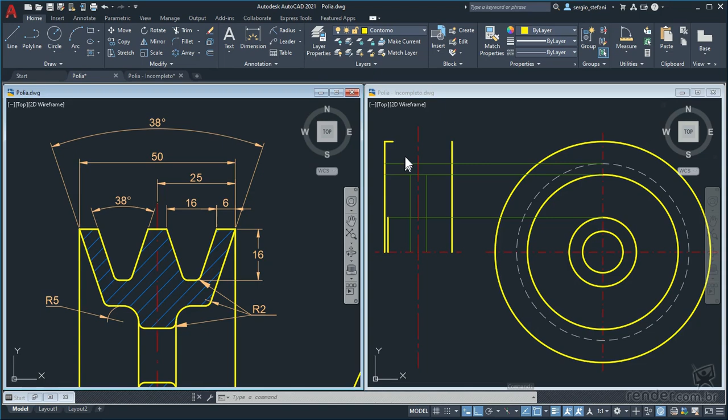We will focus on making the detail of the pulley where the strap fits. Observe the 38-degree angles. See that one side is the same as the other, so just do one side and replicate to the other. This line with dimension of 6 is already done here. So let's make this sloping line that's 19 degrees from the vertical, that is 38 divided by 2.

But since the angle is measured from the horizontal, then we do 90 minus 19 equal to 71 degrees. This is the angle we're going to use. With the current border layer, we activate the line command and click on the set point. Disable the orthogonal to better visualize the interaction. We press Tab to enter the 71-degree angle as shown. Press Tab and move the cursor down to this position.

With this inclined line made, we activate the fillet to create this radius of 2. Click on Radius, we type 2 and select the inclined line and the line representing the bottom of the belt here. Note that the opening of the belt tier is 16 mm. So we will create an auxiliary line 16 long at the end of this line, with the construction lines layer. In this way we have a base to do the mirroring of the inclined line.

With this line ready, we will use the middle of it as the mirror line of the inclined line and the arc. We activate Mirror, select the objects, press Enter. As a mirror line, using the midpoint precision tool we select the middle of the line, and with the orthogonal on, we move the mouse down and click. We answer no to whether we want to delete the original objects.

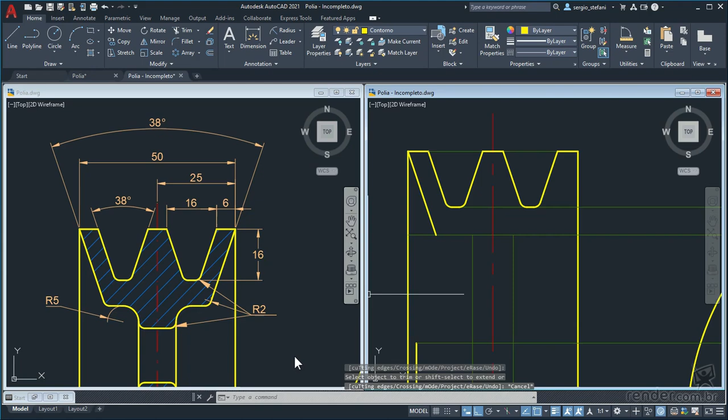See that this line is parallel to this one, so we use an offset, with the through option, and we click on this point. With Trim and the Shift key pressed we will extend this line in both directions. Now let's finish the left side and then do the mirroring to the other side. We activate Fillet and rounding as shown. Let's take advantage and make the roundings of 5 between these lines. Follow.

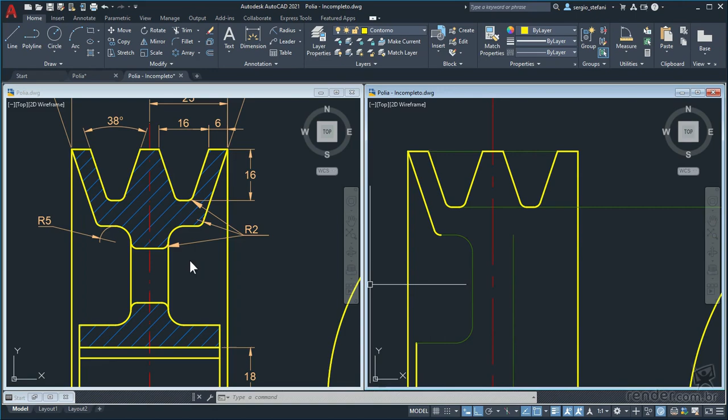See that we don't have the reference lines that refer to this opening. The size of this opening is here, with a radius of 32 and another radius of 49. From the center line we will use an offset, with a distance of 32, to make one of the reference lines. And another offset of 49 to make the other reference line.

Now we can do these two roundings of 2. We activate Fillet, set the radius to 2. We click on Multiple and create them by selecting the respective lines. Note.

With Trim, we erase the unwanted parts. We activate the line and create the line that connects the two arcs. Without any active commands, we select the objects that are in miscellaneous layers, and assign the outline layer.

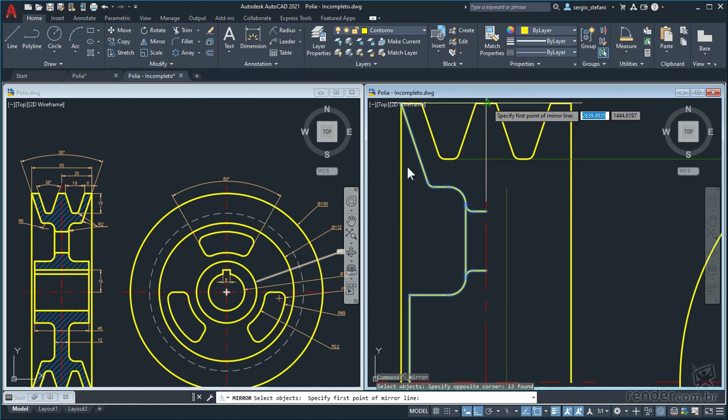With the use of mirror, we will mirror all these objects to the other side. We activate the command, select the objects, and as a mirror line we use the center line. And watch the result.

See that the bottom is almost the same, so we activate the mirror again and select all the objects. We use the horizontal center line, and we confirm it. Since the cut underneath has no tier, we simply erase this detail.

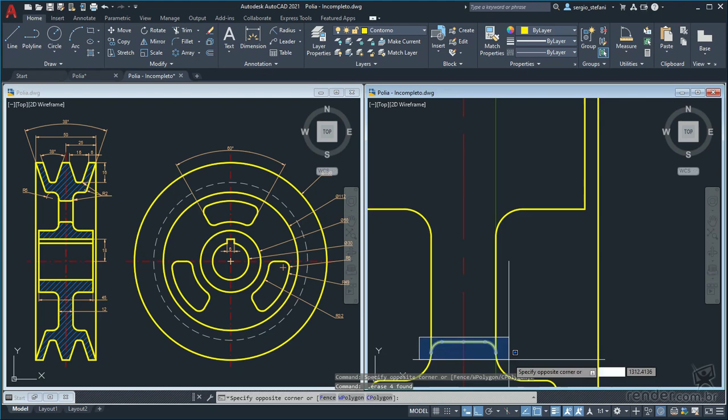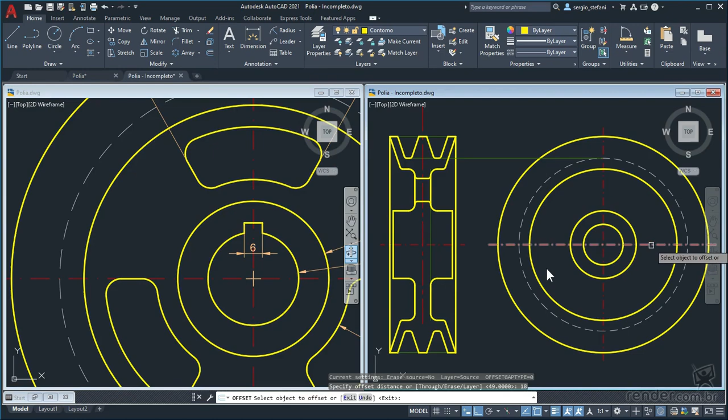Let's do the keyway of this view, then project the lines to this one. Note that the top of the keyway is 18 mm relative to the center. In this way we draw a parallel with the offset from the center line. Keep up. See that the total width is 6 so half is 3. We use the offset again, to make the line parallel to the axis with a distance of 3.

With the fillet command and the shift key pressed we generate the sharp corner between these two lines, and again between the line and the circumference. Observe the result. We use trim to erase unwanted lines. And we erase the rest. We select the objects and assign the layer outline.

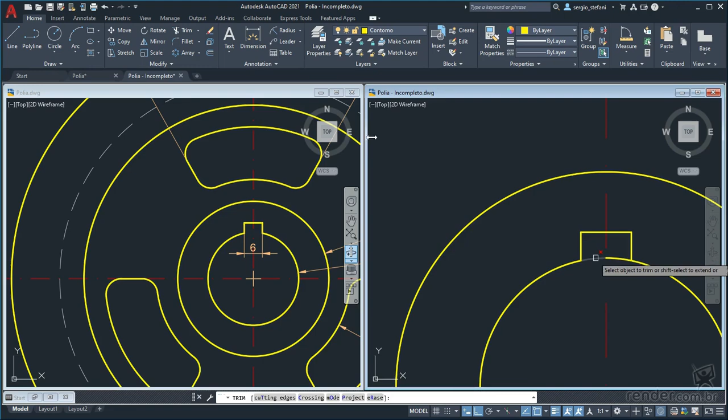We select the detail done and mirror to the other side with the command mirror, notice. With the trim again, we make the opening of the circumference, completing the detail of the keyway.

Now based on these lines, let's create the projection in the other view. We activate the line and with the active orthogonal, we make lines from these intersections until perpendicular to the central part of the pulley. Follow. With trim we delete the unwanted parts and then, selecting the rest, delete with the delete key.

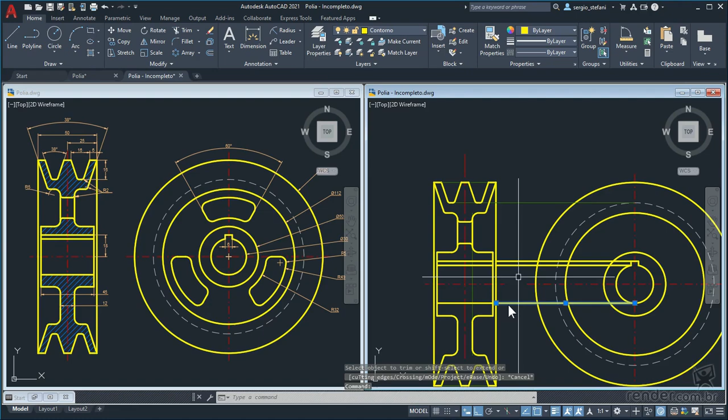Now the three openings of this view are missing. We have all the info, the inner and outer radius, the angle of opening and the small radii. Since here we have a total angle of 60 degrees, it's 30 degrees to vertical, that is 60 degrees relative to horizontal, and this is the angle we're going to use.

With the correct construction line layer, we activate the command line and start the line from the center, with an angle of 60 degrees to a position close to this circumference. We now make two circumferences, one with a radius of 32 and the other with a radius of 49.

We activate fillet and set the radius of 5 to make these roundings. We have enabled the multiple option. We select the outer radius and line. Now the line and the inner one.

With trim, we erase the unwanted parts. The rest of the construction lines we erase. We select the created profile and assign the layer outline. We used mirror to do the mirroring, note.

Now we need to have two more equidistant openings, so we use the command array, circular option. We activate the command and select the objects. We define the center of the distribution in the center of the view.

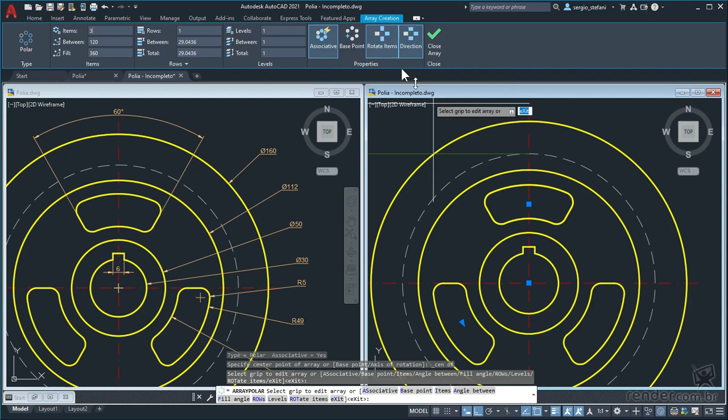On the dashboard, we change the number of copies to 3, see that the fill angle is 360 degrees and this is correct. We leave associative active and confirm it in close. And ready, the drawing is almost finished. Let's do the hatches.

We leave the corresponding layer active, and freeze the construction line layer and center line. We activate the hatch command and select the inner points where we want the fill. In this case, in 3 points as shown.

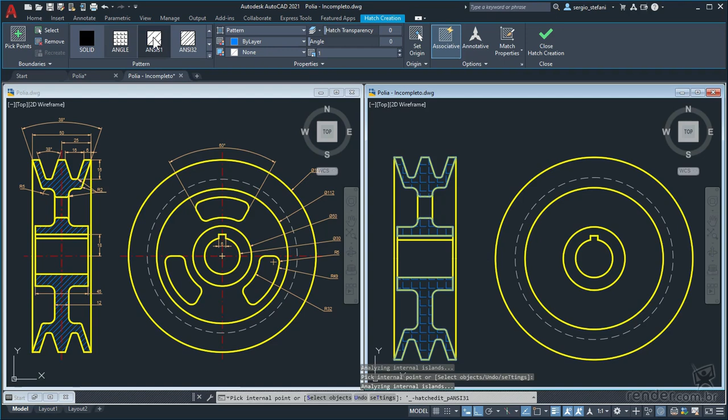In the panel we can change the pattern of the hatch, set the scale and angle. When everything is correct, we confirm it in close. We thaw the center line layer.

See that it wasn't difficult to make this drawing. Step by step you can create the center and construction lines until you finish the drawing. The important thing is that you visualize, analyze, and get started. By making drawings, you discover new paths and practice AutoCAD commands.